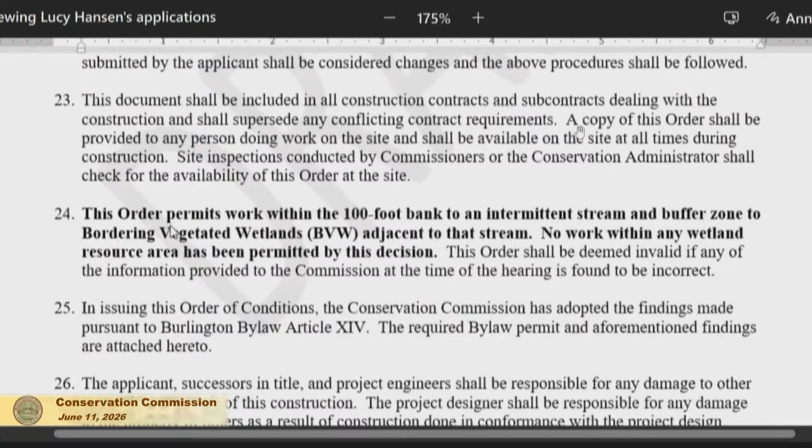This order permits work within the 100-foot bank to an intermittent stream and buffer zone to bordering vegetated wetlands adjacent to that stream. No work within any wetland resource area has been permitted by this decision. Let's see, this is our boilerplate stuff in here. Should I keep reading through or should we stop and discuss things on the way? Sorry, did we get to the 26th? Yeah, let's talk about that.

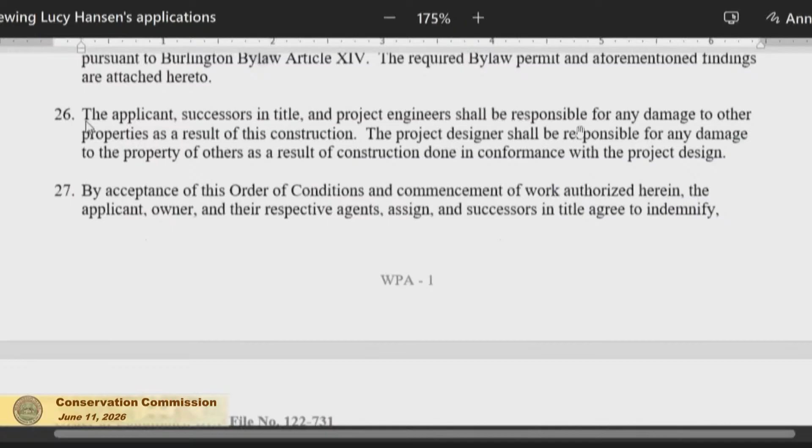Okay. So we did send this draft document to the applicant and to Dan, and there was a question about condition number 26, which states the applicant, successors in title, and project engineer shall be responsible for any damage to other properties as a result of this construction. The project designer shall be responsible for any damage to the property of others as a result of construction done in conformance with the project design.

The question that we received from Dan was about just the phrasing of this, I believe. It seems to imply that Dan would be responsible for any damage to other properties that could go on during this construction. I think you reached out to John Keeley. I did, I just wondered where it came from, and he wasn't sure. But he did have a suggestion to change it, which was convenient. Because I see what they're saying, I didn't get it at first. The way it's stated is quite broad, and assumes that Dan might be responsible for any damage.

Whereas an option could be just to say, sorry, I've got the wrong glasses on. The applicant's successors in title or project engineer, if there is a design flaw, shall be responsible for damages as a result of this construction. Usually the design engineer is responsible for errors and omissions under their license. They usually have insurance and all that stuff. And that almost goes without saying, but if you could put that in words.

Right. I think it's been unquestioned for a couple of decades, because I think you all know that it sensibly means things that could actually be his responsibility. But I understand his concern that it is written a little bit broadly. Would it make sense? What does Dan think on how it should be written?

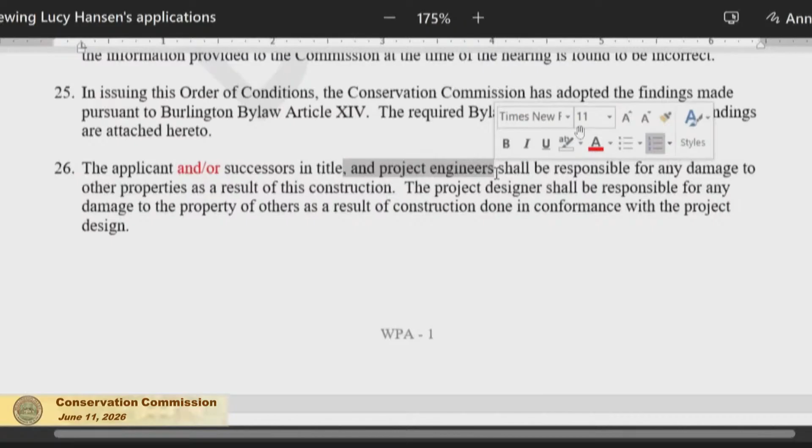You do expect the engineer to be responsible for the design. As long as something is built according to the design, then he is responsible for the fact the design works. Like stormwater design, for example. Yeah, and like in some cases we've had in the past where there was water draining into somebody's property because the design wasn't sufficient, then that responsibility would go back to the engineer, versus just not built properly. Yeah, there are two aspects there, design and the construction. True. So,

Well, anyway, I think Lucy's suggestion was that we could remove engineer as long as the second sentence remains. I think that's what you're saying? That's what I said, yeah. Do you want to read it out again, just without it? The applicant and/or successors in title shall be responsible for any damage to other properties as a result of this construction. The project designer shall be responsible for any damage to the property of others as a result of construction done in conformance with the project design.

Okay, so that says if it's done as designed and doesn't work, then it's the designer's responsibility. I agree with that. That makes sense. Okay. We're all satisfied? Cool. Yep. All right.

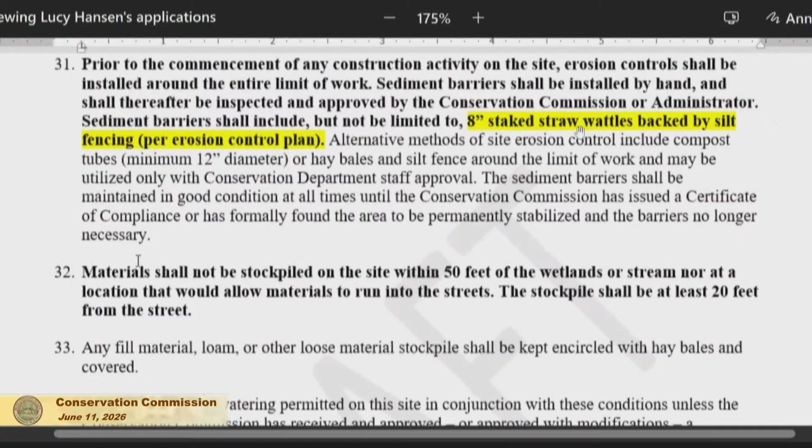Materials should not be stockpiled on site within 50 feet of the wetlands or stream, nor at a location that would allow materials to run into the streets. It should be at least 20 feet from the street. That does put you in kind of a tight spot. If that becomes an issue, reach out, we'll talk. Just because it is one of those sites, again, where the stream is right there behind the house. Any fill material, loam, or other loose material shall be kept encircled with hay bales and covered. No dewatering is permitted on the site. If there needs to be dewatering, reach out.

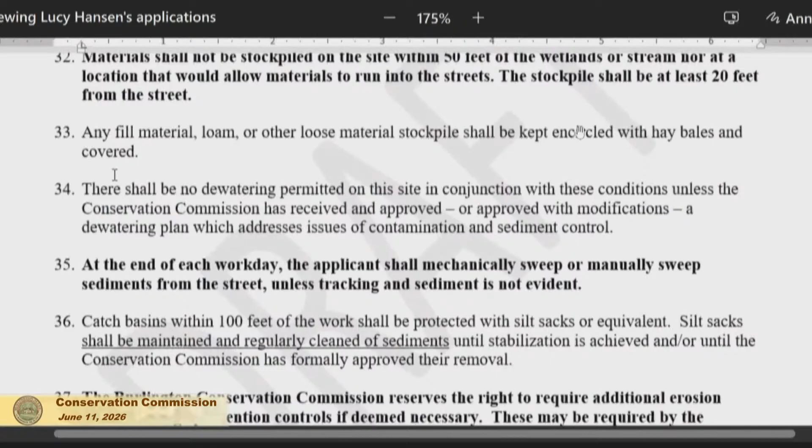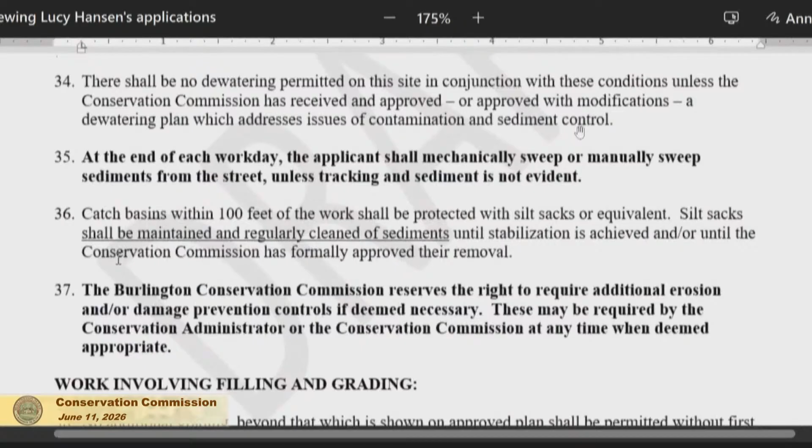At the end of the workday, the applicant shall mechanically or manually sweep sediments from the street unless tracking and sediment is not evident. This is one that if you don't do that, because my office is right around the corner from your house, I will know. And then you will hear from me, and it won't be fun. So please make sure people do that. We reserve the right at any time to require additional erosion controls to be put in place, and I will say that if it needs to happen. No additional grading is approved beyond what is shown on the plan.

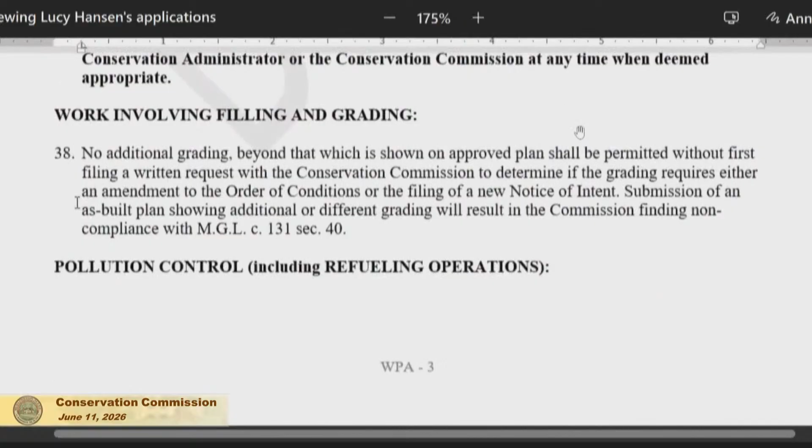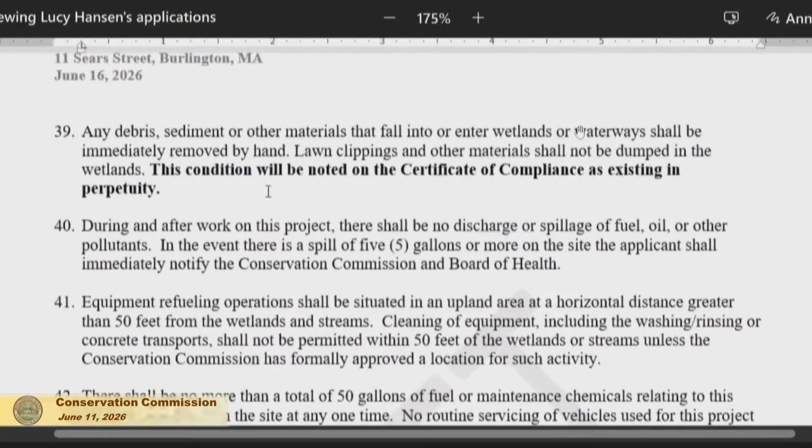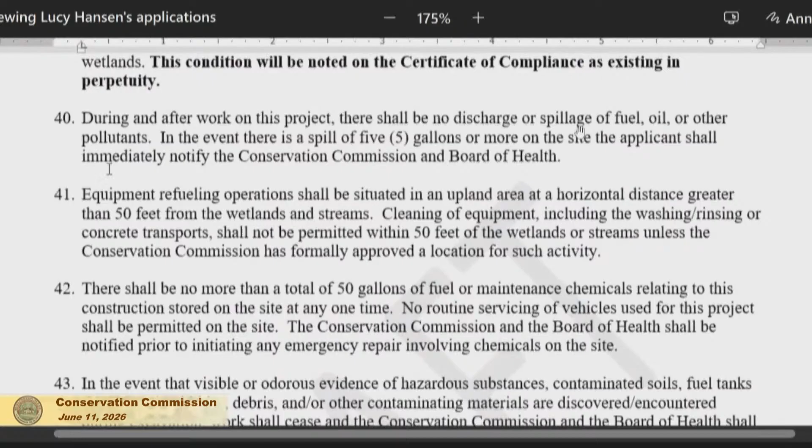This is the pollution control conditions here. Any debris, sediment, or other materials that fall into or enter wetlands or waterways shall be immediately removed by hand. Lawn clippings and other materials shall not be dumped in the wetlands. And this will exist in perpetuity, so you may never ever put things there again. During and after work of this project, there should be no spillage or discharge of fuel, oil, or other pollutants. If there's anything more than 5 gallons, you have to reach out to us and the Board of Health. Any refueling should happen at a distance horizontally greater than 50 feet from the stream and from the wetlands. No more than 50 gallons of fuel on site at any time.

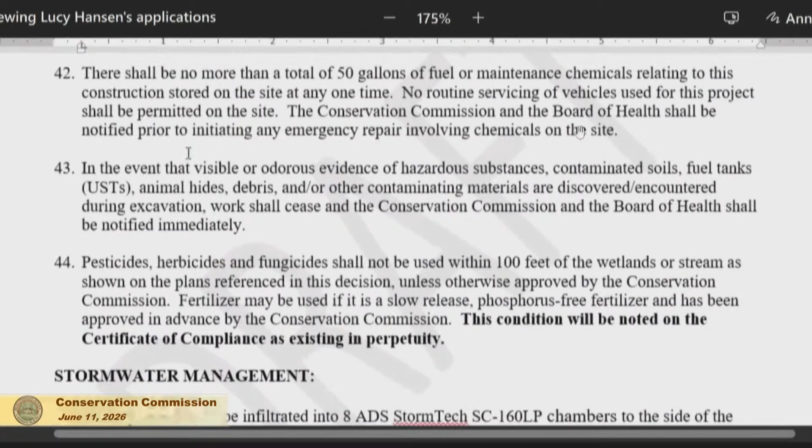This is some stuff about hazardous substances. This is again saying pesticides, herbicides, fungicides shall not be used within 100 feet of the wetlands or stream as shown on the plans referenced in this decision, unless otherwise approved by the Conservation Commission. Fertilizer may be used if it is a slow-release phosphorus-free fertilizer and has also been approved in advance. That's a lot.

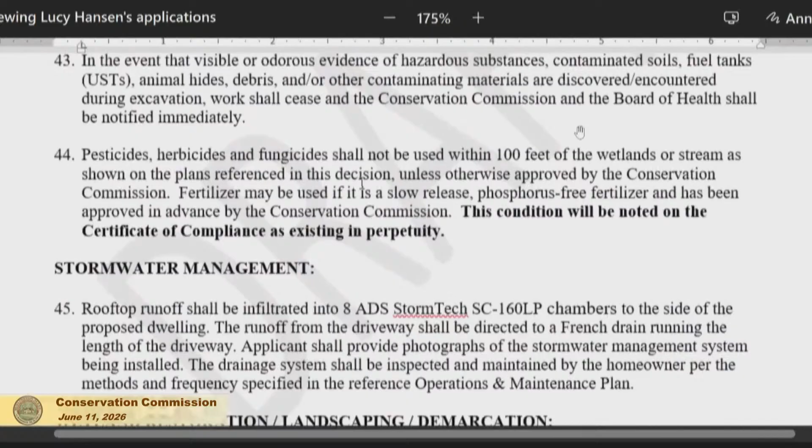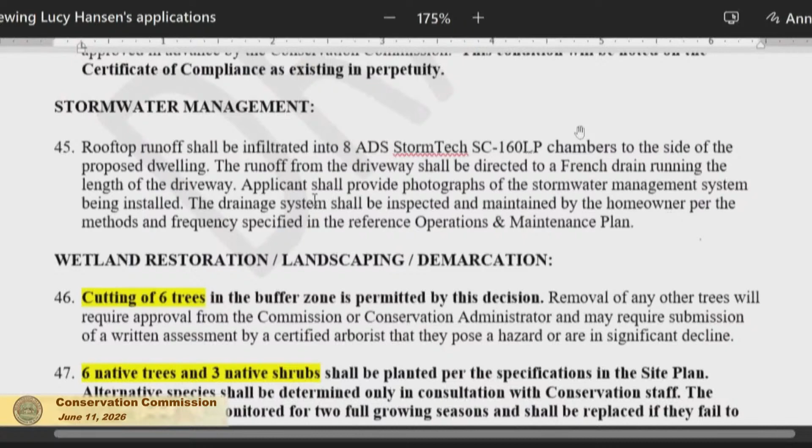Stormwater management is 8 ADS StormTech SC-160 LP chambers, as shown on the site plan. The driveway runoff is going to go into the French drain running the length of the driveway. This, again, is highlighted because we always talk about it. 6 trees in the buffer zone are allowed to be cut. 6 native trees and 3 native shrubs shall be planted per specifications on the site plan.

Do we want to add in anything about regular standard tall boy, river birch? Yeah, don't say per the specifications in the site plan. We have some standard wording, if that's okay, just to say species may be decided in consultation with conservation staff. It's already in there, yeah. We're fine with the initial ones. It was just those dwarf ones, we just want to talk about an alternative, okay? Yeah, we're flexible on what we'll put in. Excellent. Okay. So we'll just leave it at that.

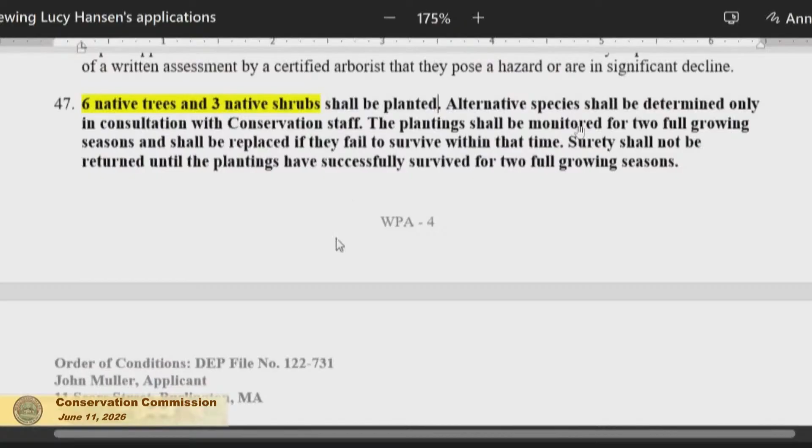We will not sign off for CO for you to move into your house until the plantings are in and the site is stable. And these are some things here on how to get your certificate of compliance, which is required as part of your project to close out your permit. Let's switch back really quick to the bylaw decision, there it is, and say all of those conditions on the other document are also included in the bylaw, and there's a proposed $2,500 bond for this project.

Okay, thank you. Mr. Muller, any comments or questions about that? No, I do not. Thank you. Okay. Commissioners, any comments on this property and the application? I'm good with it. Okay. This is a public hearing. Is there anyone in the audience or online who would like to contribute before the hearing is closed? I see and hear no one. So can I have a motion to close the hearing for the notice of intent at 11 Sears Street to demolish a dwelling, construct a new dwelling, DEP 122-731.

So moved. Sarah, how do you vote? Yes. Indra? Yes. Ed? Yes. Rob? Yes. Larry? Yes. And the chair votes yes, 6-0. Can I have a motion to adopt the findings under Burlington Bylaw Article 14 for the project at 11 Sears Street? So moved. Second. Sarah, how do you vote? Yes. Indra? Yes. Ed? Yes. Rob? Yes. Larry? Yes. And the chair votes yes, 6-0.

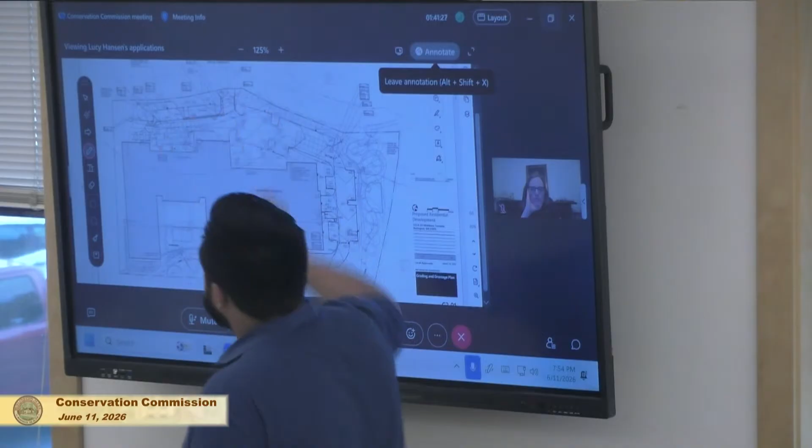We have data from an older geotechnical report. We had some borings along this portion of the site that showed sand, which is great for infiltrating, and showed groundwater to be 20 feet below finished grade. Below existing grade. So we believe that these are really good areas for infiltrating.

I want to also mention that this design is very conservative. Sand is classified as a type A soil with, I believe it's 8.2 inches per hour of infiltration rate. We were pretty conservative and assumed an infiltration rate of 1.02. So these right now are very conservative, and the footprint will likely shrink come construction when we can go out there and dig up appropriate test pits, which will be witnessed by the Board of Health as well.

So we have water quality units. I don't remember what manufacturer we went with, but something like Contech. And they are essentially larger drainage structures. Where are they? They are the last structure before anything enters the chambers. They're in front of both chambers? Yes. So there's one here. And then there's one here that looks like a catch basin. It's a water quality unit with a catch basin grate on top, just because we were pretty tight on room there. So those water quality units will handle the phosphorus removal and will help with the total suspended solids.

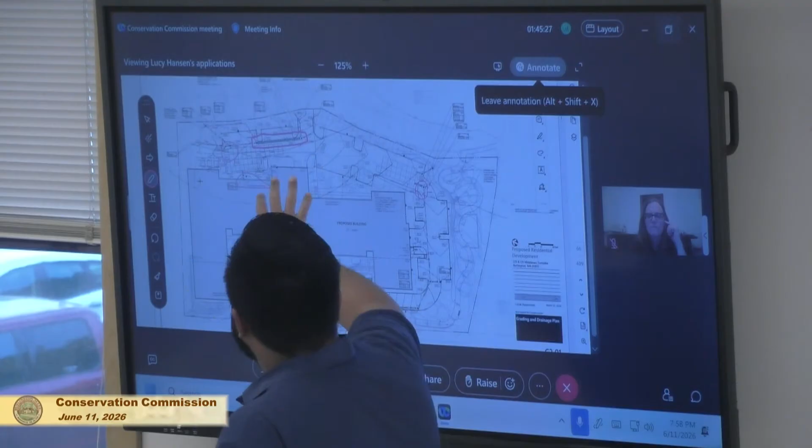Now, you said it's servicing two structures. What structures are you referring to? It is this catch basin here right at the entrance of the site, because we want to capture as much of our runoff as possible. And then this one right here. And this structure at the very end is an outlet control structure, which acts like the other ones for the infiltration chambers. Anything exceeding the 100-year storm will overflow in that structure and then go out into public drainage.

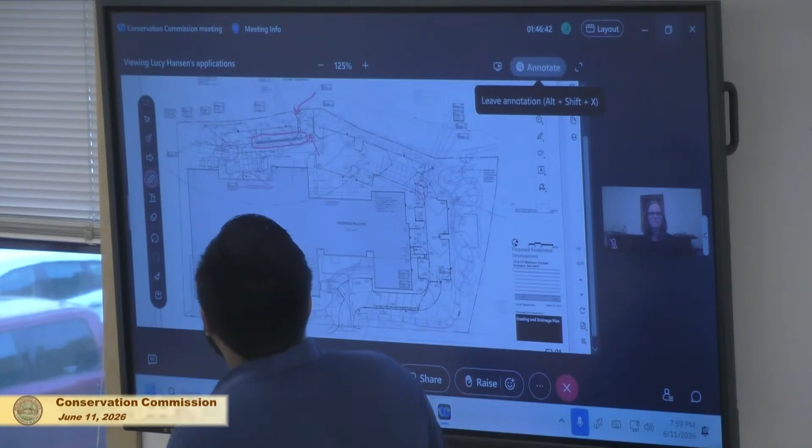Okay, but the normal less than 100-year storm flow through that, does that then go into the infiltration chamber? No. So that just handles a small area by itself? Exactly. Okay. So does that part have any TSS reduction? Yes. It does infiltrate, and you have the fabric that holds any sediment or whatever is left behind from the runoff, as well as the deep sump catch basins that capture some of the heavier solids.

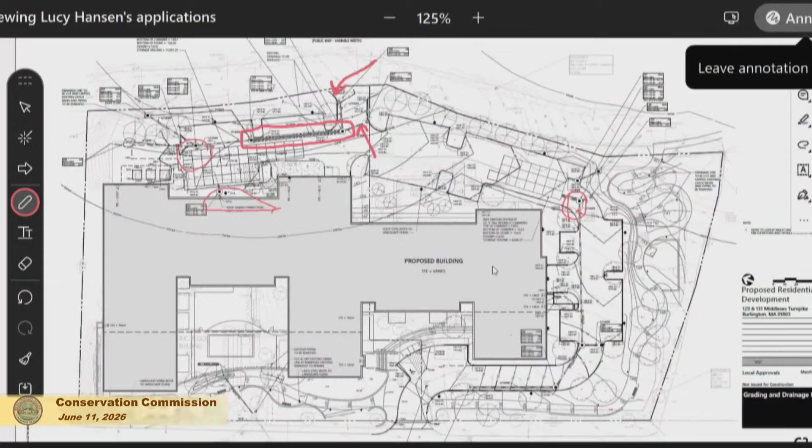And do you mind scrolling up just a tad bit? I want to say that this is also a water quality unit. Hold on, sorry, my screen's having a stop annotating. I'll have to check with my chief engineer, but I think that's also a water quality unit. Or at least it should be. Oh, it also would help.

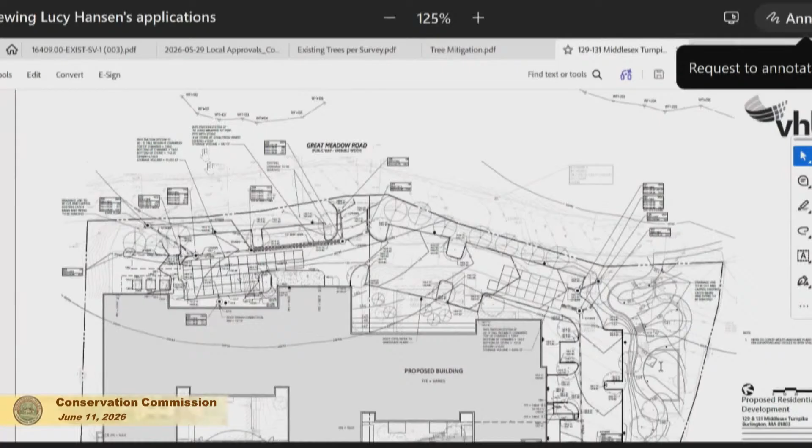Did that help? Yeah, thank you. I don't think it's labeled as such, but no. I think we'll have to revisit. I think that has to be a water quality unit. Okay. Yeah, and again, comparing to existing conditions where there was no treatment, we're reducing and treating a lot. Yeah. Okay, let's see what else we got.

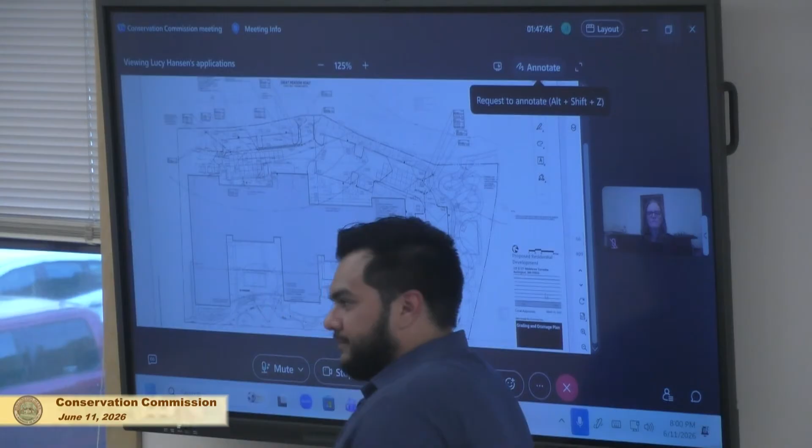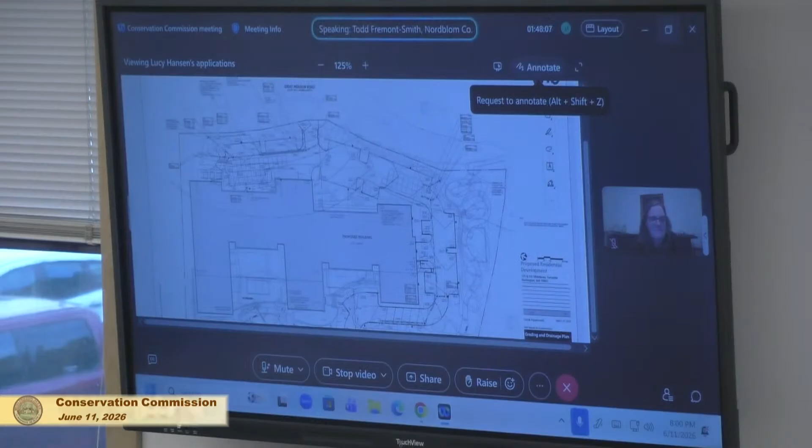Any other comments before we go to the commission? No. Okay. Sarah, do you have any comments on this at this point? I love the park. The dog park? Thank you. Linear park. Okay. Ed? I can't really add to it. No, Rob? Not on the storm. Yes. You got-

What is the net change in impervious area? So that's a really good question. And I do want to say that we are in the middle of receiving comments back from planning board. So our areas might change a little bit, but currently we are about net equal to existing. Net equal. Yeah, which is about 67% of impervious area.

So you mentioned about the groundwater, it's about 20 feet below. Yes. Which you got from the previous geotechnical report. Yes. Are you planning to get anything? Any test pit? We are planning to do test pits at the location of infiltration at the time of construction, and that will be witnessed by the Board of Health at the time. And you have parking underground, right? Yes, 2 floors. And how deep? So I know you said water level is 20 feet. But what would be the elevation?

Yes, so I mentioned earlier that there's about 20-foot grade difference. So if you're standing on Middlesex Turnpike and you look at the building, the first floor is flush, let's say. When you start traveling down the site, you'll start going down in grade. Then the first level of parking will look flush, because you've stepped down. And then once you reach the end of the site, the very bottom floor will be flush. So you're not really deep. You're almost at grade at every entrance. So the first floor level is flush with the ground level, basically? Essentially, yeah, from the front.

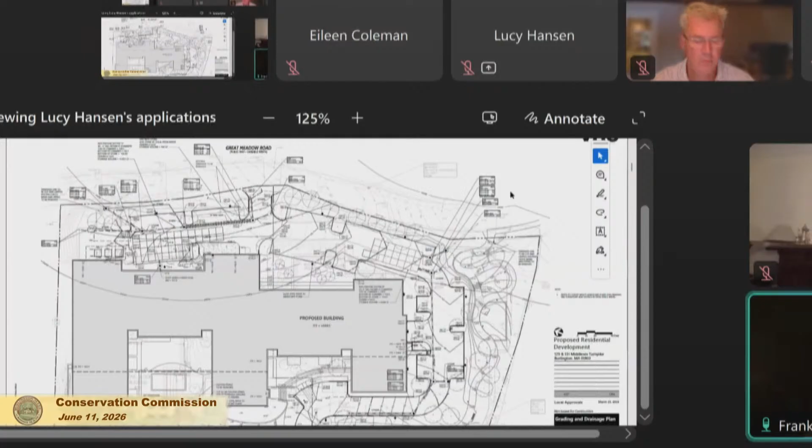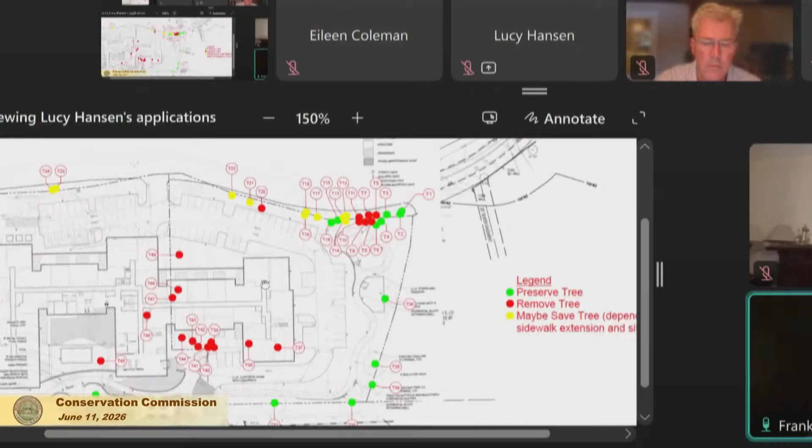I do want to mention a couple of other items. Both Chase and Marco did a great job, but one of the items I know, talking to Lucy, that the commission is concerned about are the existing trees on the site. So, just a little background, and we can show you some pictures. The VHB survey folks went out in early May. We surveyed all of the significant trees on the site. Anything over 6 inches was considered significant. We prepared a plan that located them. That plan was then sent off to the project landscape architect, Copley Wolff.

They looked at the trees and the grading and decided which ones we could certainly save, which ones we couldn't save. And this is the plan they put together. The red trees are the ones that are going to go. Obviously, all those red trees in the middle of the building area would have to go. The green trees are the ones they're going to save, definitely. And then they were looking to try to save a bunch of the other trees, which are shown in yellow. So essentially, the existing very significant trees along Middlesex Turnpike, which is the bottom of this plan, those 9 green tree spots, would be saved and protected.

We were as careful as we could in putting together the park area on the southerly side, or the right-hand side of the plan, to save whatever significant trees we could there. The one area we could not is where we're bringing out our pathway to attach into the new sidewalk that will run along Great Meadow Road to the south. So there's a cluster of trees there that won't be saved.

Essentially, the only other tree that we had an issue with is one that's right adjacent to the parking. You can sort of see that. There were 49 trees identified, so each of the trees is identified with a number. So you'll see number T20. That tree would be unlikely to be saved.

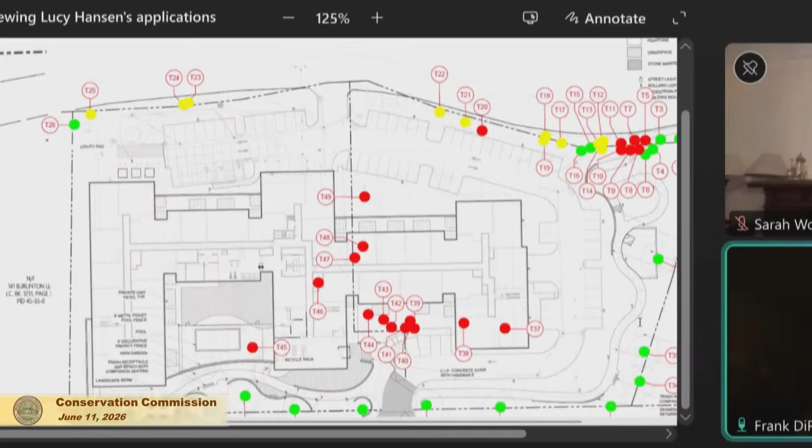At the same time, we have a landscape plan that shows they're going to be putting in a number of supplemental trees to make up for, as best you can, the existing trees on the site. And you'll see those along that area there as well. The landscaping plan, you saw the pictures that Todd showed, is really going to be very robust and looked at bringing in pollinators and things like that, but I wanted to note that.

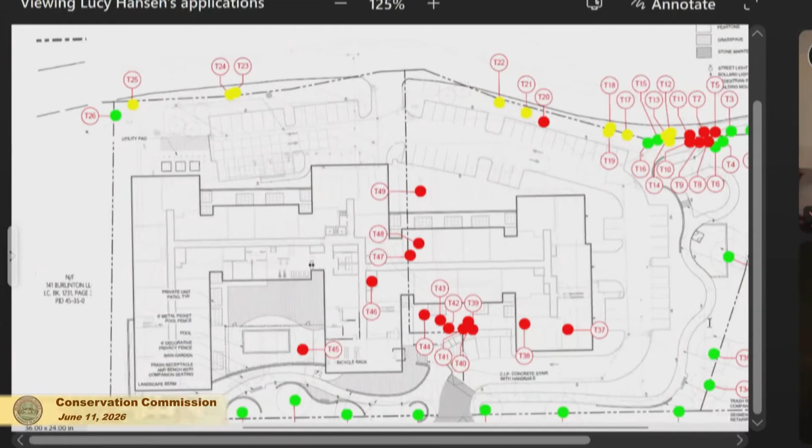And then just a couple of items on the stormwater. The Board of Health has reviewed and issued their sets of conditions. They will include, as Marco noted, that at some point before construction we will go out there with the excavators. We'll dig down as far as we can. We'll have the soil evaluators there, also representatives from the Board of Health. We'll provide that information so that we can verify that the soils are in fact better than we designed for, and two, that the groundwater is 20 feet down or whatever else.

That's pretty certain. And the top of the page, or the easterly side of the site, is really going to be trying to grade as much as possible to meet up with the existing grades along Great Meadow Road.

The other item, sort of a future thing to think about, is there's been a discussion with the planning board, and it actually goes back to the town meeting approval of this rezoning of the site for the MBTA communities, that with the path we're showing through the park on the left and the right-hand side of the site, Northern Bloom and VHB will be responsible for creating a sidewalk that will run from our site to the south, basically to the right on this plan, and will tie into the existing sidewalk that the town built a few years back at the DPW yard.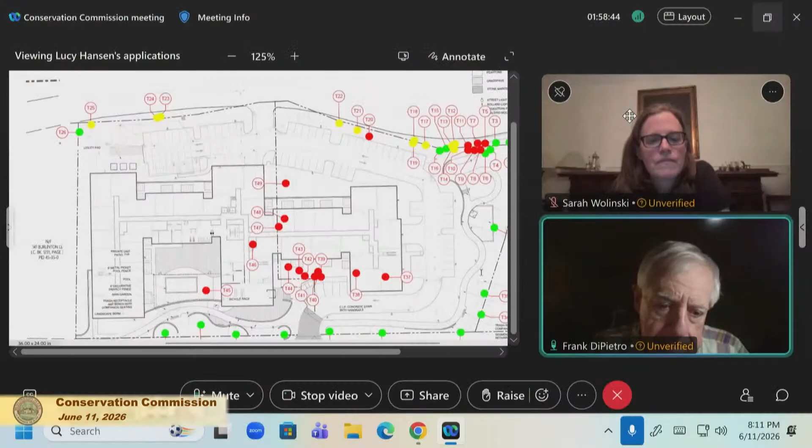Frank, is there any way for you to turn up the volume at your end? I think it's at our end, but you're quite quiet. I think it's our fault, but I'm wondering if you could turn yourself up. I will do that. Or just get closer to the mic.

Any way you could show a map? Because my understanding is that the bridge, or at least Vinebrook, is on the other side of the entrance to the Staples Plaza, and I'm not quite sure what bridge you're needing to build. I'd love to hear more detail.

Okay. So is that any better sound-wise? Okay, good. Not a lot.

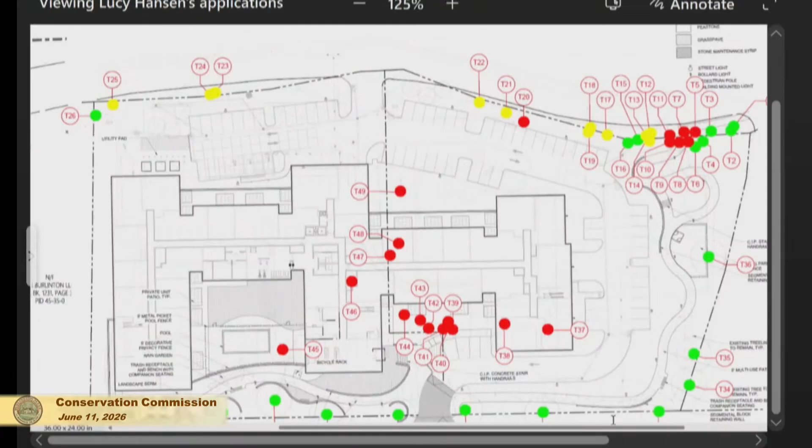So if you're driving down from our site south towards Mall Road, again, as you're driving down on the right-hand side, you'll come to the Staples driveway. Oh, I know what you mean. Probably about 50 or so beyond that driveway, there is a culvert bridge under which the wetlands areas on the Brixmor property, the Staples site, flows into Great Meadow area. There we go, we have it on the plan.

Okay, so you'll see the 30-foot driveway easement on the upper right of the corner. That is a driveway going into the Staples Brixmor site. You will see about a half an inch above that to the top of the page, the Great Meadow Road, there's a little berm or sort of wall on either side of it.

Just to the right of that is an existing water main. My understanding is it used to serve as a water connection from the pumps farther down on Middlesex Turnpike that provided water to the DPW yard. It is abandoned. However, the DPW wants to be conservative and may want to reuse that pipe in the future. That sticks up and is probably a foot or two above the pavement at the bridge area on Great Meadow Road. So we have been in discussions with the DPW folks about could they lower that?

And right now they're suggesting they want to keep the pipe as it is and not lower that. If they can lower it, we would put a 6 or 8 foot wide bridge adjacent to the existing roadway that would have a connection for a sidewalk right by the existing driveway that would cross that and tie into, there's a tree just above the little red line. That tree is where the beginning of the existing sidewalk at the DPW yard starts.

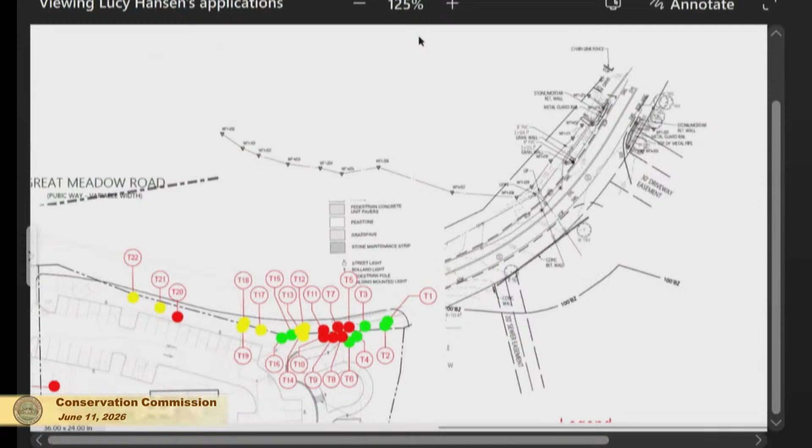Yeah, if we can get a thorough coverage of the stormwater tonight, that would be good. Do you have more questions about that yourselves? Yeah. Okay. Larry? Did you say earlier that there's no stormwater treatment currently on site? Correct. So, in the existing condition, that water is, some of it's running off into the street in Great Meadow Road, is that what's happening? I believe there are a few catch basins. At the bottom elevation? At the bottom elevations, yeah.

And where does that connect, into the street? That connects into the existing underground drainage system. Into the street? Into the street, yes. And then the stormwater pipe discharges into the meadow field? Is that what's going on here? Frank, are you able to confirm that?

So what happens with the existing stormwater system in Great Meadow Road, that runs down essentially to where that bridge is we were just talking about, and it discharges at that point. It discharges actually directly into the Great Meadow area. Okay, all right. So it discharges on the opposite side of the Brixmor, the Staples site.

And the proposed condition is all of it's infiltrating, or most of it? How would you characterize it? I would say most of it is infiltrating. Most of it is infiltrating? Yes. So the water ends up in a different place than the way it does now? Yes. It'll be recharged into the ground. Okay. And I assume that the groundwater goes from west to east. Is that correct? Towards Great Meadow?

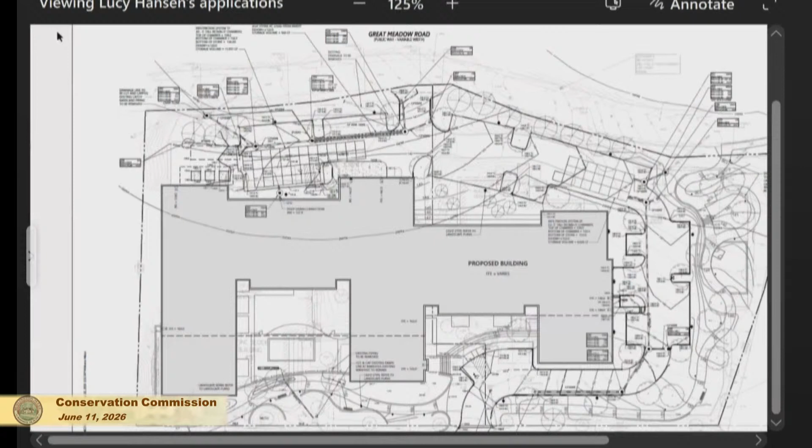Okay, so I got a couple items that I noted that you said you would provide related to drainage. One is you said LSP data would be provided. Some comment about the total phosphorus removal for the part of the drainage that the perforated pipe handles. You also mentioned at one point that they thought there was a third water quality unit in that area. Could you clarify that, because it's not shown on the drawing? And then if there's any changes from planning regarding the drainage because of widening the driveway, you could fill us in on what happened at planning.

Okay, anything else? No, just when do they want to continue to? Yeah. Based on all that. Do you want to continue to our next meeting in 2 weeks, or the first one, the only one, in July? We'd like to go as quickly as we can, because we'd like to start this project next spring. And we have about $1 million of drawings we have to do. So I missed what the answer was. Is that at the next meeting? We'd like to come to the next meeting.

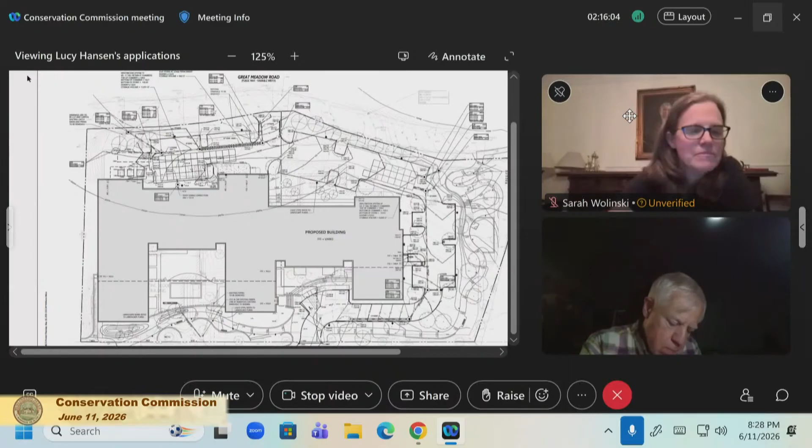Okay. Yes, please. Todd, we do try to line it up with planning as much as possible, though, just so that we don't like to issue something and then have them make a change that would require you to do an amendment. So that's what we're just trying to get a handle on, I think. Okay. But why don't we just continue to the next one, and if that doesn't work for them, then you'll just... Yeah, we can always continue ahead of time. Right. So let's plan on the 25th. That's fine. And then if we need to continue, we can always push it. Yep. Very good.

On that note, can I have a motion to continue this hearing until... Well, first of all, this is a public hearing. Is there anybody here from the public that would like to make a comment, online or in person? The answer is no. Okay, can I have a motion to continue this until the next meeting on June 25th? Second. Okay, how do you vote, Sarah? Yes. Indra? Yes. Ed? Yes. Rob? Yes. Larry? Yes. And the chair votes yes, so 6-0 to continue to the meeting on the 25th.

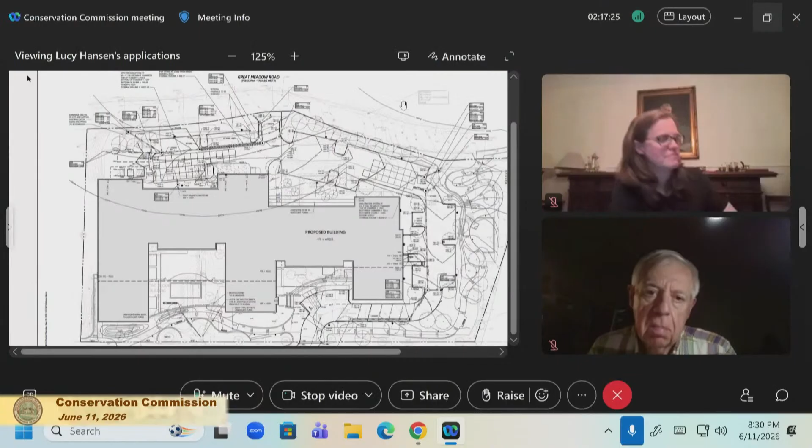Thank you, gentlemen. Thank you very much. Take care. Okay. Can you just handle introductions while I take a brief break here? Sure.

Okay, we have a continued public hearing. It's item number 8 on the agenda. It's a notice of intent, 7 A Street for American Maplewood Properties LLC. It's for material storage and crushed stone parking area. It's DEP file number 122-715. Thank you all for waiting. Could you please do your introductions and say who you're affiliated with, please?

Sure. Good evening. Chip Nyland, representing the applicant, American Maplewood. I have Mr. McDonald here with me. I have Andrew Pandolf, Rick Salvo, who's the engineer, and Bill Manuel. I'm just going to speak briefly and say thank you to the commission for giving us a little time to come back. I think we had a pretty productive meeting when we were here last time. We heard you. Mr. Salvo wasn't available, if you recall, so he's our engineer.

He's developed a revised plan that has stormwater and a lot more mitigation and plantings. So what we're hoping to do is to discuss that. I'm just going to have Mr. Salvo start off and walk you through the revised plan, and then Bill Manuel will walk you through how we are in compliance, and then we'll be able to answer any questions. Very good. That works. Thank you.

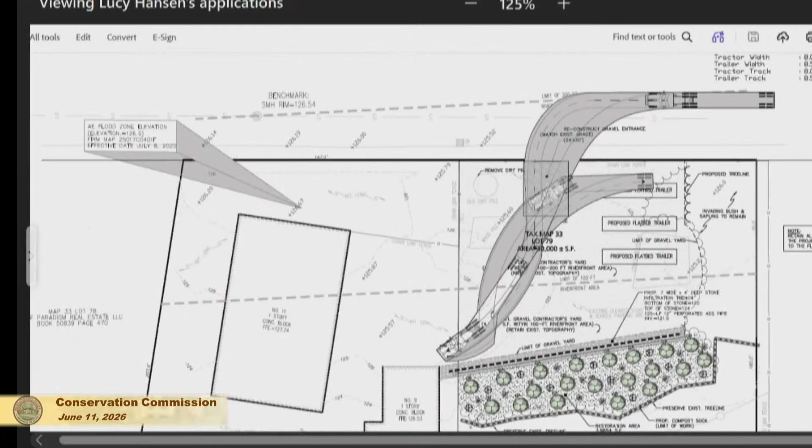So our first task was to determine what the minimum area would be necessary in order for the truck traffic to be able to access this site. It was my understanding that there was a request to try to minimize backing up and beeping on A Street. And we basically used a tractor-trailer turning movement, turning into the site and backing up, that would access those trailers that you see there, to establish what we would need for a footprint to be able to access the site.

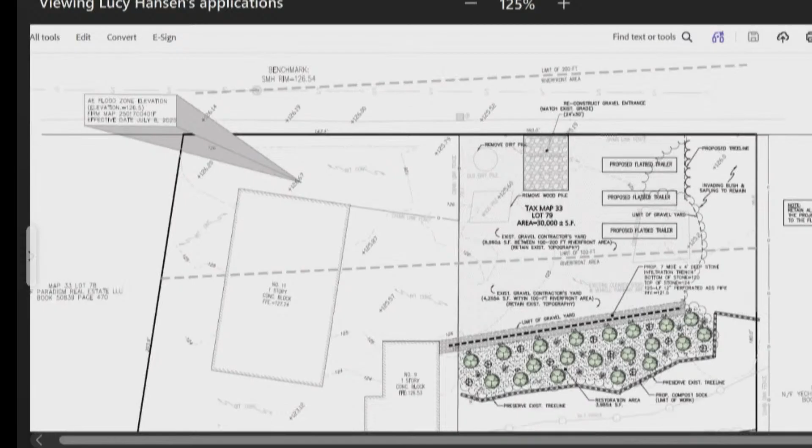All that footprint, based on the site visit that I was at, was all sort of hard pan gravel. The hard pan gravel today exists up to the tree line, which is sort of at the very bottom of the page along that erosion control line. Once we established the minimum usable area, if we could go back to the other slide, we then wanted to show some improvements to this site to basically significantly improve the functionality of the riverfront area.

I would note from the tree line back, this site is relatively flat, so it's not like we have a very steep slope with a super strong pitch heading back to that riverfront area. That said, a lot of this area doesn't have a giant impact on that riverfront area. Nonetheless, we did come up with a restoration area that would convert current hard pan gravel, about 3,985 square feet, to a restoration area with a series of 40 different plantings that I'll let Mr. Manuel talk about during his part of the presentation, series of trees, shrubs, plantings, and then a conservation seed mix.

In addition to that, just to try to improve water quality in the area, we've created a stone infiltration trench that'll be about 4 feet deep, 7 feet wide, that would separate the restoration area from the existing hard pan area. The way that would be built is the filter fabric would be wrapped along the top of it, and the top 4 inches would be top dressed with a washed stone. The reason why we do it that way is obviously this is not a paved site. There's no impervious surfaces here, so it is possible for fines to migrate their way down. And in the event the fines do migrate down into that 7-foot wide strip, they would get caught in that 4-inch layer on top.

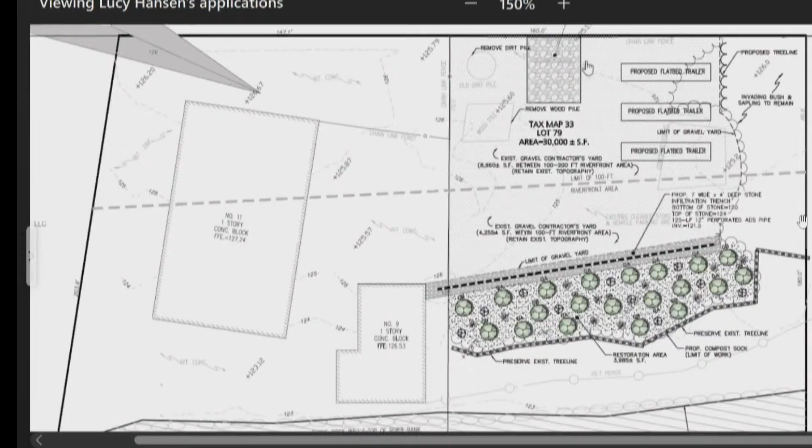Okay, I appreciate that. Very good summary of the changes since the last time we saw it.

I understand that you're saying that, in your opinion, this is a site that would be redevelopment, and that 10.58(5) applies. I always get it mixed up, but anyways, it is 5. And the lawyer provided a precedent case called Algonquin, and that precedent would seem to support that. But we have found a number of other DEP decisions that actually contradict that. So we still have quite a discussion amongst ourselves.

And it would appear that the main thing we need to resolve is whether this is redevelopment, new development, or a hybrid of the two. That's what we really need to resolve on this right now. And the DEP information we obtained, there were several that said very similar conditions were called new development in some cases. Well, I would like to see those cases.

That was brought to my attention last time, so I went and I did my Shepardizing. I spent most of my life in front of the department on these cases, and I know them pretty well. And those cases that I cited, there was nothing within those cases that said anything to the contrary. I provided you with a case. If there's a case out there, and I said this to you last time, I'm not aware of it, but it was very clear in the case that I provided to you, the wetland scientist from the North Shore said that since there was some topsoil and organics presently, it was 2019, I believe, therefore it was not a degraded site.

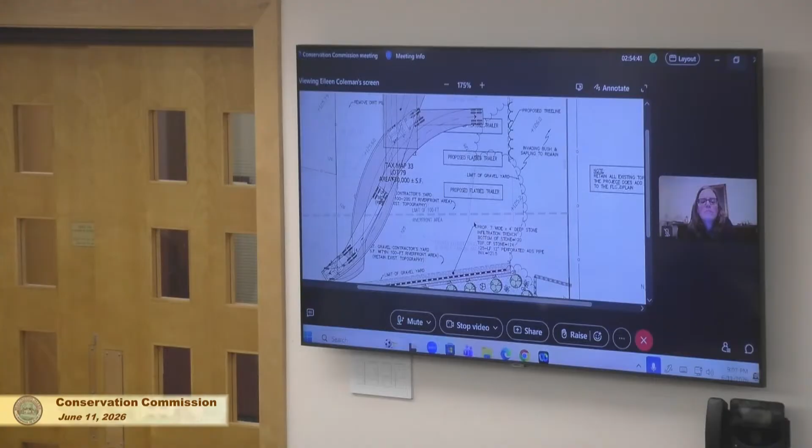Yes. And I just want to point out, just so that nobody feels like we tried to pull the wool over your eyes, Andrew has pointed out to me that there is a small triangular area of vegetation that will be removed. I just really wanted to square that area off. Where is that on this? That's short of the tree line, though, right, Bill? There's a little bit of tree line that's going to be moved back a little bit here, basically shrubby stuff. This is the proposed tree line, this is the current tree line. Bill, can I ask a question just to clarify something on this plan?

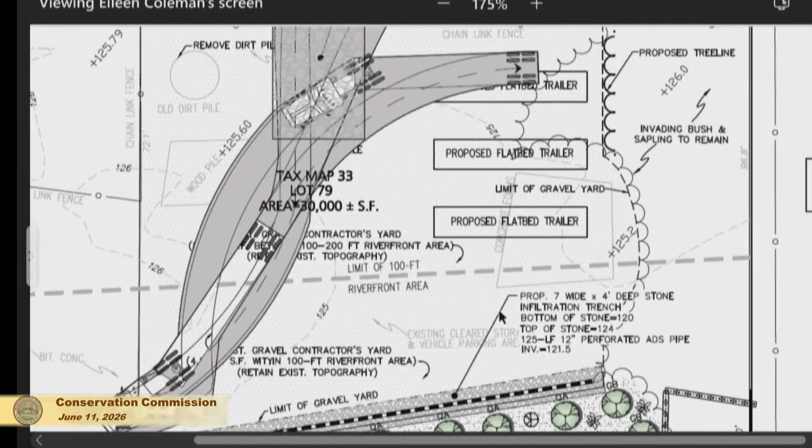This area down here, I'm not sure you can see my arrow very well. Yeah, I can see it. So below the 100-foot, but above the restoration area, what material is that? I'm going to have to defer. What's the surface? That right now is a hard pan. What are you proposing to make that surface? We'll keep it the same as right now. Pervious gravel surface. So you're not going to let the grass go back the way it was before the violation? Is that what you're saying?

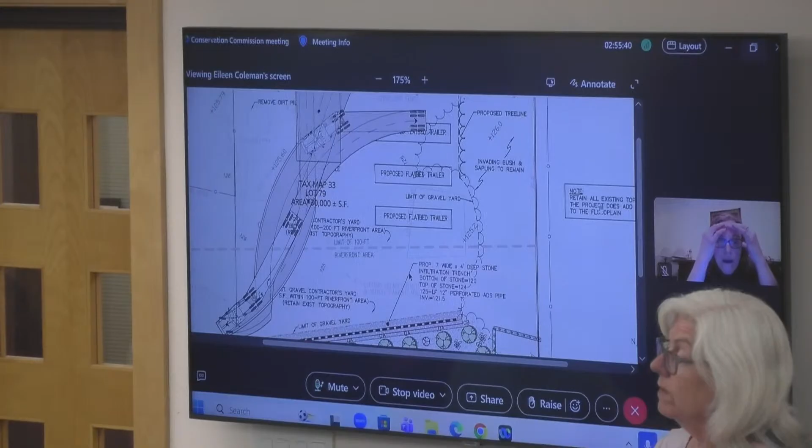Well, don't forget, I think there was a golf course company that was here before. No, they were not allowed to, they did not get a permit. Well, they stored turf, they stored materials, right? They stored grass seed pellets on that. I don't know if I should interject. You intend to use that area, right? Correct. Yeah, it's going to be maintained. Use this area within the 100 foot? Yes. I thought this was the only area.

Right, but it doesn't need to go in there. That's the area that we would like to continue to use. Let's hear from the other commissioners first. Okay, can we hear from some of the other commissioners now to see if there's any other opinions here? Sarah, what do you have to say on this? Anything?

In my opinion, this is a really challenging edge case, and you can make a good argument in a number of different directions. The plan I see before me seems like a decent compromise. I am satisfied with it and would like to end this discussion. And do what? Accept the conditions as he's proposing? Pretty much. Okay. Indra, how about you? Yeah, same thing with what Sarah said, I agree with her.

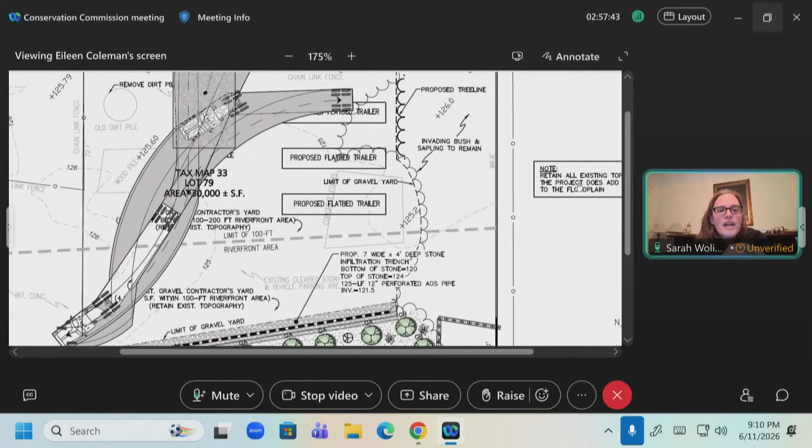I liked what Larry said about, you know, you look in that ancient blurry photograph and you see the trees kind of filling in the bottom third and the right-hand side, and that's sort of what we have here. I don't think we're going to get a nice, bright, clear answer that's going to please everybody. I think we're just going to have to pick something in the middle that irritates everyone. If everyone is equally unhappy, that's the best decision, right? Ed, what have you got to say on this?

It's all starting to make a little bit more sense. I think that direction that Sarah is referring to seems to be, you got to come up with something that's workable on both sides. I don't see any easy answer. It's like having a sandbox in your backyard for kids, and all of a sudden the rabbits own it. You know, go make the rabbits happy and the sandbox do what it's got to do. Okay.

Rob? I mean, I agree. I think it's somewhat complex, both the use of the site for storage, but then also the desire for the commission to protect the riverfront. And it is a somewhat complicated site as well. I was looking back, and I think October 21st, 1996, the site flooded.

There was an RAO issued for 11 A Street on February 18th, 1997. I think this would be the golf company for a pesticide release. It looks like at that point, they've possibly stopped storing their materials on the site. It's not exactly clear reading what their description of it is. So I think, for the current owner, the current usage,